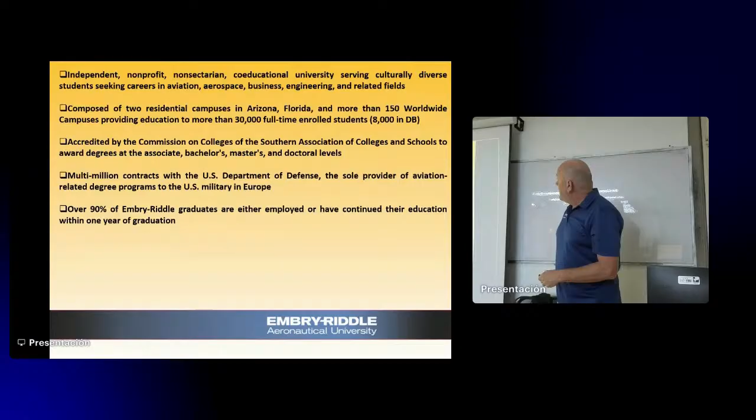Yeah, that used to be it's actually pretty old information. I tell you, I was asking my department chair to give us the best of the best, the latest, but the new department chair is lazy. Sorry, it's the French lady, she doesn't want to do it. So for that reason, she just sent me some kind of overall, like one number. I'll show you that slide, one single slide. Used to be Tassos, he would give the whole spreadsheet of different statistics. Not much anymore. Okay.

Accredited by the Commission on Colleges of Association of Colleges, etc. We have a lot of money coming from the Department of State and Department of Defense. Department of State is tiny, like the Fulbright scholarship - you get something, but not much.

Department of Defense, of course, is big, because we have the largest ROTC contingent in the country, I think. ROTC is basically for people who want to serve in the army and take classes at the same time, so we have the largest group. You'll see them marching on campus all the time, raising the flag, etc. Students basically get the education for free if they serve in the army.

How about that? I know some Russians will ask, can we actually serve in the army? But I mean, it's not for everyone. I guess if you're a citizen, or maybe even a resident, I don't know, you can serve in the army and get education for free. That's another option.

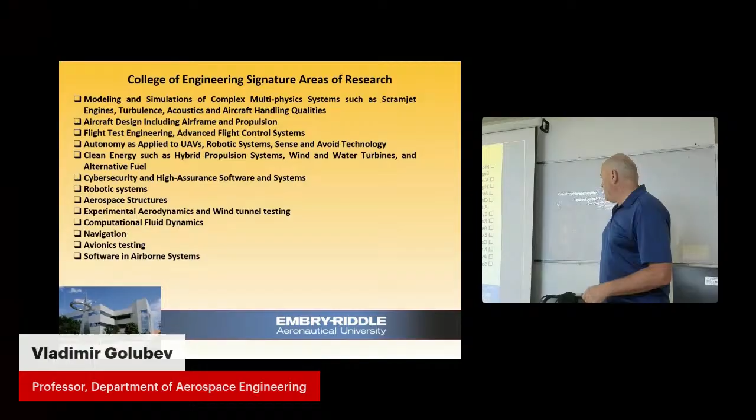Okay, this is our college. Used to be when I came in 2001, that was the most modern building. If you look at the campus at that time, there's nothing to do with current. Everything was demolished except for that building, so this is now the oldest. Everything else is brand new, so this is like a shiny campus, looking very, very modern.

So now what's the split in the engineering departments? This is what makes it really unique. We're like 75% aerospace engineering, and usually it's the opposite. Usually aerospace engineering is either its own department or it's part of mechanical aerospace, or mechanical aerospace and ocean engineering combined. I've seen different arrangements, but usually aerospace is smaller. We have the majority of things in aerospace.

So we're really proven in aerospace. You see all those other places - computer science, electrical, mechanical, civil - regular things, but they also have an aerospace flavor. We like the ones which are focused on all that.

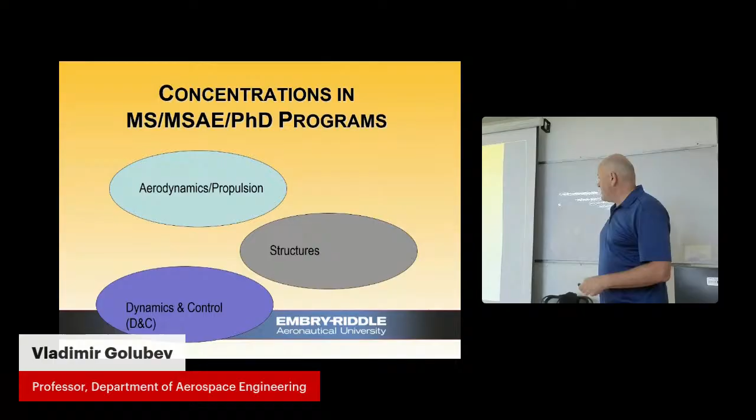We have the legacy course. It was taught by several faculty - Kinzel was teaching that, the Rinsons were teaching it. But of course the guru just finished, retired. He became, just announced last week, a professor emeritus - a very famous guy who used to be a distinguished professor. He was number 5 aerospace engineering specialist in the world. There's a ranking of all aerospace engineers in the world, like millions of them, but he was number 5 in the whole world. And he was sitting right next to us - it's Gordon Leishman.

Leishman wrote this bible of helicopters called Helicopter Dynamics or something like that, and that's what everyone uses in the helicopter industry and academia to learn about rotorcraft. So he just retired - I got this information yesterday together with a short notice from our department chair. That was part of the department faculty meeting, which I of course missed.

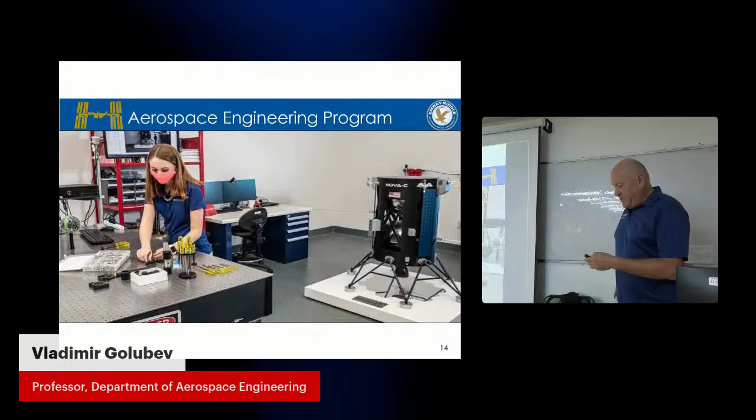So that's how the building situation came to be - almost 30 years, and now we're up to the new building. In fact, we don't have enough space because the number of faculty over the 20 years that I've been there more than doubled. The number of students, I think, tripled.

I'll show this number. It's good. And then,

We have concentrations, so in 2000 that's a big event for us. We started the PhD program only in fall 2013, and the very first PhD student was my student. Nguyen, I'll show his picture. He's now a group leader at Lockheed Martin. So he's a big guy now.

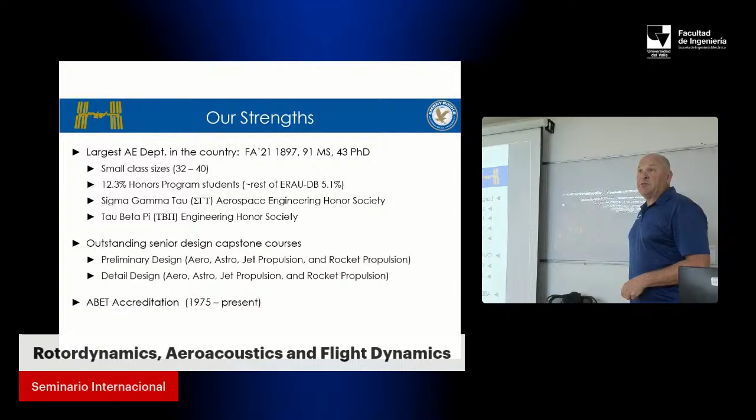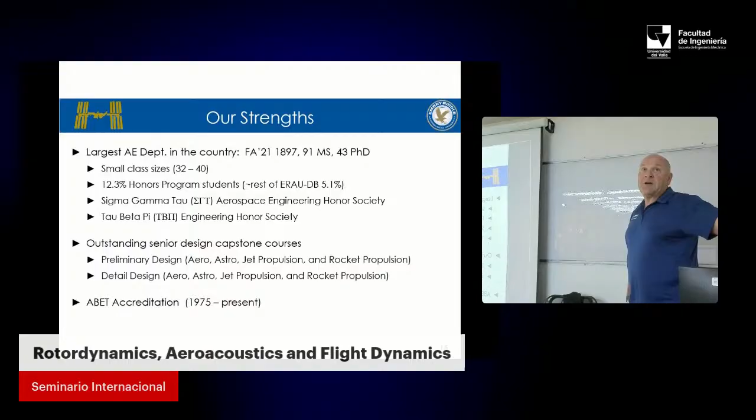Do you have ABET accreditation there or something similar? Our universities are... I think they're not. It's a pain in the neck for everyone using it, you have to do accreditation. That's one of the problems when you try to do any kind of dual degree with another university—the first thing that comes up and cuts the whole thing is: are they accredited? How can we do accreditation with them? It's a very strict process, so we cannot just take courses from outside the country or from a university that's not accredited. Otherwise the degree will not be accredited. It's like a loop.

High-tech facilities, MicaPlex—that's a research park established for technology development of some companies, hybrid aerospace things, etc. We have this new... well it's not that new anymore, it's like 8 years old, but everything was new: the new Eagle Flight Research Center.

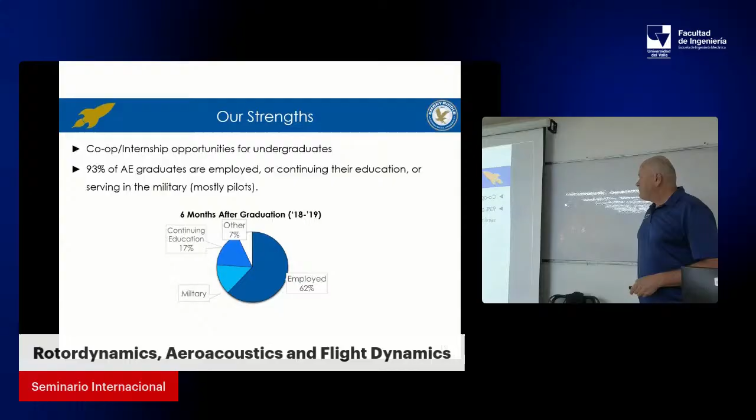Ranking - you're all familiar with the US News and World Report ranking system. That's what everyone watches - all the families look at what is the best school, what is most expensive, because US News and World Report publishes this ranking, like a big brochure with all possible things, like the best out of space, the best this. But anyway, for 16 years in a row we were the #1 school, but that was when we didn't have the doctoral degree, because doctoral degree schools have a different ranking - they're in a different area. So that was the issue.

Now we rank #5, I'll show you. Now we're tied with Michigan because we started a doctoral degree program. So that's an issue - graduate school is still ranked #32 right now, but we're catching up.

So there's lots of competition, because again we have over 100 clubs. You do competitions like coming up next or something. So we have these competitions, usually organized by AIAA - our main society, American Institute of Aeronautics and Astronautics.

I encourage all students to become a member - that's our main professional society, so we're all part of it. All conferences we go to are AIAA conferences. And there's all kinds of competitions, particularly important is DBF - design, build, and fly. You actually build a plane from scratch and fly it following some rules.

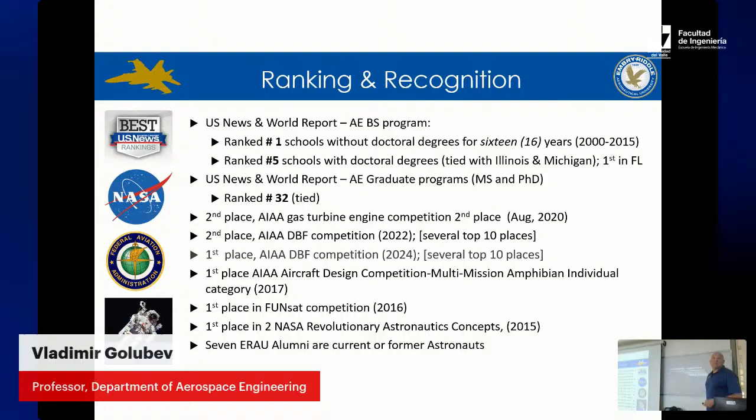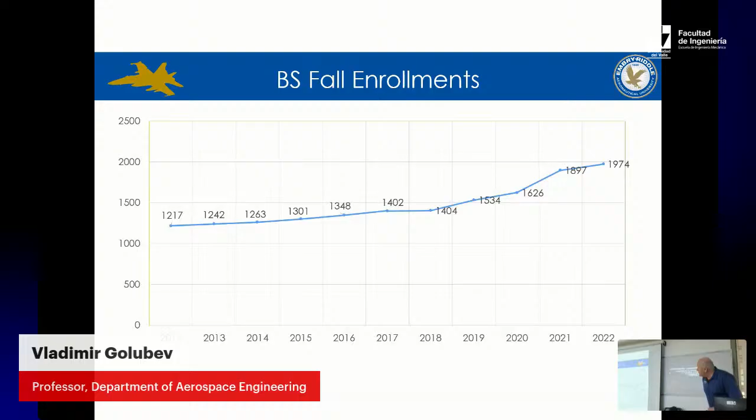So this is up to 2022. You see how things were going up - this is basically our undergraduate enrollment in the fall of 2020. It was going up from 2012. Look at that, from 1,200 to like 2,000.

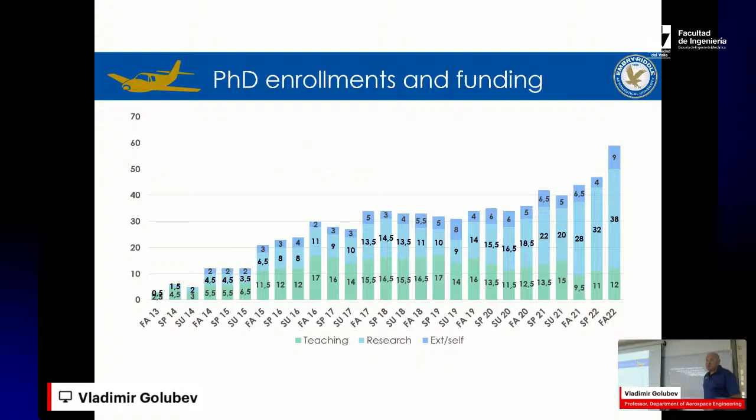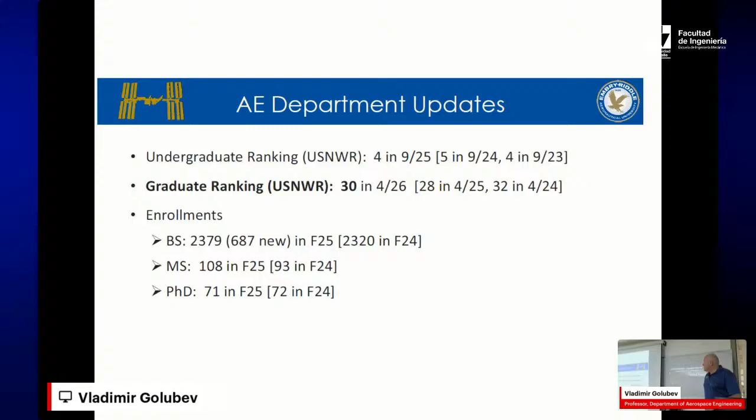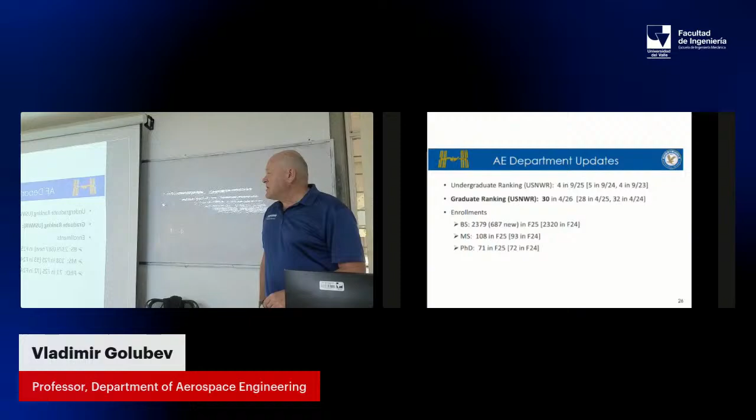Okay, so this is the enrollment, the latest data in fall 2025 - almost 2,400. So we doubled in 12 years the number of students. You see this aerospace engineering alone - it's not like the whole university, it's our undergraduate degree in aerospace engineering, 2,400 students. Unbelievable. I think number 2 is like Georgia Tech, like half of it. And then the rest - so we're like way ahead.

And then PhDs, we have 71. Masters 108. I like PhD more, because usually PhD is basically what people can commit to - they commit for 4 or 5 years, they do research, they can do something. Masters, they want to finish in 1 year, that's it. So if they finish in 1 year, you basically just give them something and they're gone. There's no time for any kind of meaningful research, so that's usually the bad thing about masters. So we don't usually offer much, specifically for internationals, well for everyone - we don't really offer much support for master's students, only very select ones. For PhD, everyone is covered, of course, because they all come from countries which have no funding otherwise.

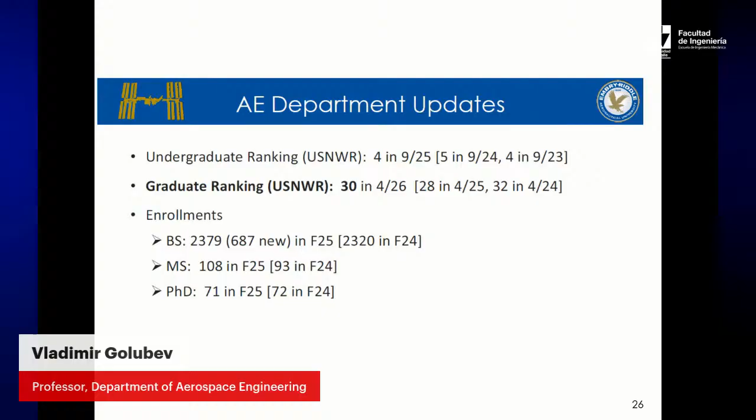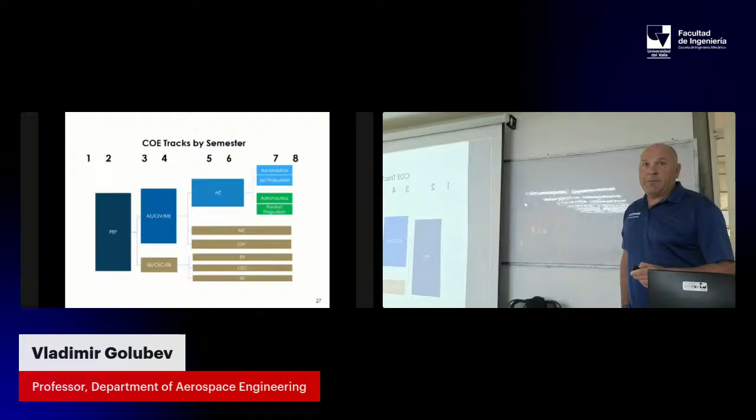So this is actually the tracking of the COE tracks by semester. As I mentioned, the first 2 years is pretty much combined - this is a fundamental engineering program. The first year, everyone takes the same thing, all different departments do the same. Then in the second year, there's a split between the computer guys, electrical, and the civil, mechanical, aerospace - there's different courses. At the end of the fourth semester, second year, they make the decision who's going to aerospace and who's going somewhere else.

So this is the split, 5th semester, 3rd year. And then eventually in the last year of the undergraduate program, that's where there's a clear split between aeronautics, jet propulsion, astronautics, and rockets. Usually people make this or that selection, so they can take courses in any of those. And of course, a lot of people go into astronautics - thank you, Elon Musk, because everyone is trying to do some space stuff. But still, we have a lot of people doing aeronautics, and especially now, as you'll see from my presentation, aeronautics is becoming really big. We have a lot of different things going on in aircraft, and it's a really interesting time to be there.

So basically this is all split depending on what different people want to do. Like if you want to actually do aeronautics, this is for people interested in broad knowledge about atmospheric aircraft - airplanes, helicopters, unmanned aerial systems, and all kinds of things.

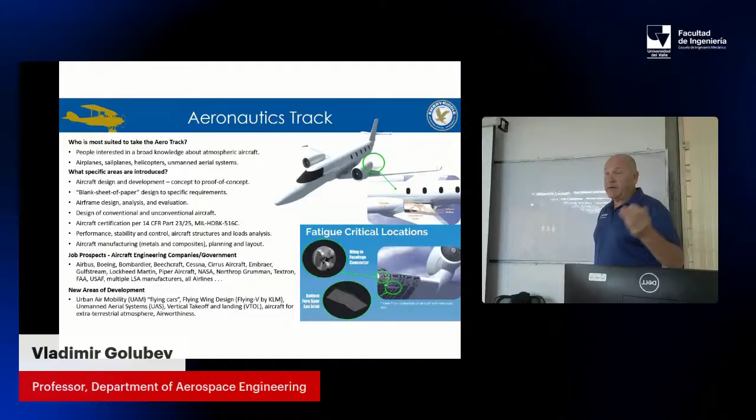This is what we're doing right now with NASA - the flying cars concept, which is what we're going to talk about. This is becoming mainstream: flying wing designs, vertical takeoff systems, and eVTOLs particularly - electrical vertical takeoff and landing aircraft.

That's what you definitely need to develop in Colombia. That's your future, guys, because that's how you're going to fly - between here and Manizales and Medellin, not going through Bogota, just straight across. It's like a taxi, or you go over the ridge and get right over.

That's something we should do. Companies like Joby or Archer are really developing this, very interesting. Dubai would be very interested in this because the first thing they talked about was flying in Dubai - of course Dubai has all kinds of money to invest. We're ready for everything, not so much now, but in general.

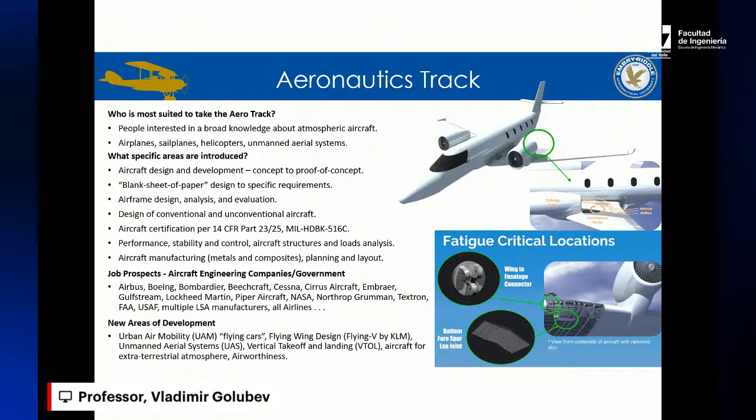Jet propulsion - a lot of things related to jet engines. That's what I teach, jet propulsion, although I also teach aerodynamics and CFD, lots of different things. So air breathing engines and jet propulsion, all kinds of things.

You can design turbofans, turboprops, turbojets, ramjets, or scramjets - any of those things is what you can get in this area.

There are companies who hire mainly engineers in the propulsion area - Pratt & Whitney, GE, Rolls-Royce, Honeywell - those are the main companies that hire in this area.

So there's a lot of things here. Cycle analysis is the biggest part - you do cycle analysis as part of the jet propulsion course, which is how you do your preliminary design of engines.

We move to the most sophisticated stuff, which of course involves CFD functions - you need to do computational analysis to understand the motoring process and everything else, along with materials, combustion, and a lot of things combined.

For extracurricular activities, as I mentioned, there are zillions of student clubs. We literally have student club fairs where the whole campus is filled with booths of students showing what they do, not just for design and stuff like that.

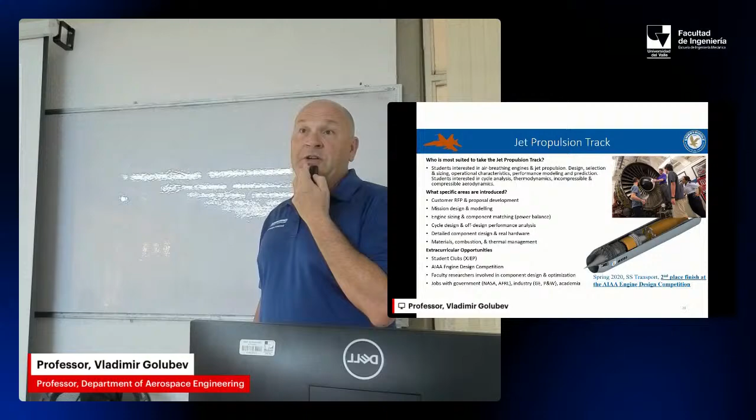I mean that's a big thing - if you like sailing, I like sailing too. It's also, by the way, aerodynamics, since aerodynamics can be applied both to airplanes and sailplanes, sailboats, and also bicycles, which have to be designed for competitive events.

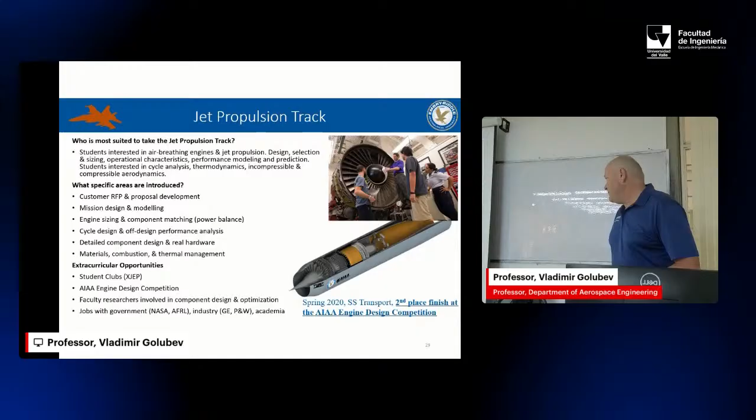I had some faculty and students who went on to be designers for the new generation of bicycles for big competitions, because they design very aerodynamic shapes. So aerodynamics is everywhere if you think about it - lots of researchers are involved in these things.

Astronautics relates to extraterrestrial activities - you can go to Mars or somewhere else to design satellites or rovers. We have faculty heavily involved in designing Mars rovers, for instance, or cube satellites. The school is doing a lot of things with space, and it takes Elon Musk to thank for that in part.

A lot of things on performance too - you have the sounding rocket club called Icarus, that Dr. Perel was doing for many years. I think somebody else is doing all this stuff now.

And rocket propulsion, well, I think you mean rockets, right? It's rocket propulsion, propellers, yeah, that's what I'm thinking about.

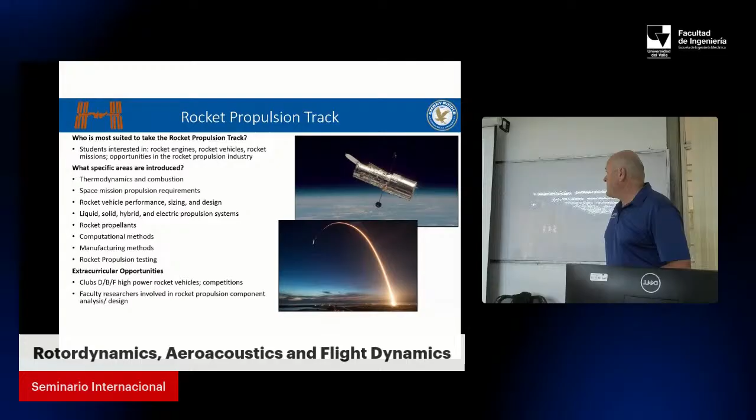Many clubs as well. Now, let's get to the actual area of research for all groups, but there's several faculty involved. I'm just director of the lab. We have a number of faculty and a whole bunch of students involved in activities in the lab. This is actually a lab.

The first PhD student I was talking about is from Vietnam originally. He just had a baby with his wife, so she's very happy. Probably, I'm not sure.

This is actually my collaborator for many, many years, and he's a founding dean of the College of Engineering. That's Dr. Mankbadi, that's him. This guy is somewhere at NASA. This guy's in Hawaii. Our faculty member from Romania, very interesting guy, doing all kinds of controls. At some point he said, I just want to live in Hawaii, sorry, bye-bye. He went and established his own company in Hawaii. I'm not sure what he's doing, but he must be very happy. I think he's surfing most of the time.

I'm sure. There's another guy from India. This used to be a DOD guy, but then he left. He's from Eglin Air Force Base. He was a scientist there. We collaborated with our reports. Anyway, people change completely, and we just have two of us left. Look, Mankbadi and myself from this group.

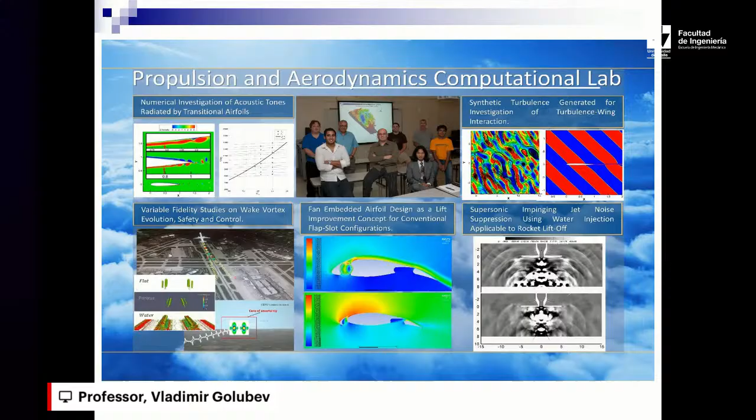In 2010, I was researcher of the year at Embry-Riddle, like best researchers. So that's funny, they decided to start this tradition at that time, that the researcher of the year presents his research to the whole university at the huge main auditorium, like celebrity hour. And so I was the very first one to do that. Honestly, I was the very last one too.

I was the only one who started, and they decided not to proceed, because I guess the administration was frustrated. I think they couldn't understand the work, so they said, that's it, but finish the thing. So I was the first and the last. This was actually the title slide for that presentation, because that's pretty much what we're doing.

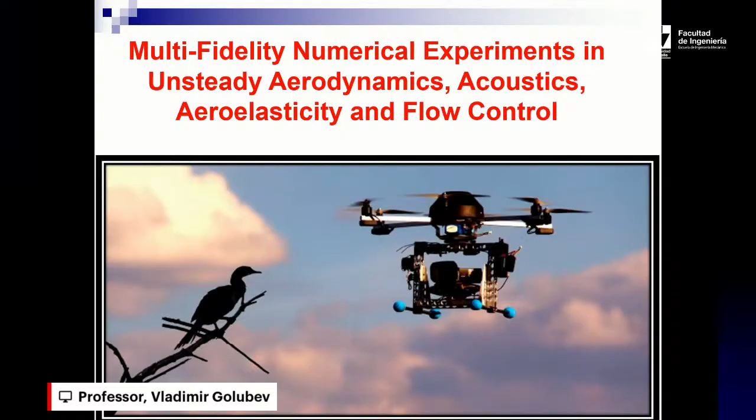It's multi-fidelity numerical experiments in aerodynamics, acoustics, aeroelasticity, and flow control as well, because we actually have that. So it's all numerical experiments, I had to calculate, but it's actually multi-fidelity. We're actually moving very rapidly into the area of multi-fidelity or variable fidelity codes, where you combine various tools which have different fidelity levels, and they need to be verified and validated, and that's one of the biggest things for us.

So in this presentation, let's see how much time. Okay, so this presentation is very introductory.

So what I'm planning to do is show basically the slides, like one slide per project, what we were doing recently, because other projects specifically will be focused on in the next presentations. So I'll be kind of circling or spiraling, there'll be more emphasis in some areas, and then even more emphasis later on. So sometimes I will address the same project three times, so you'll see that it will be more and more detailed. So at some point, once you repeat three times, maybe you'll understand that. Repetition is the mother of learning, right? So you have to do that.

So very quickly, what we're doing, a lot of things with flow control. Flow control is a big thing now, so you can control aerodynamic flows, but also for acoustics, for propulsion. There's a lot of actuators which do this, and a lot of closed loop control systems which do this, including nonlinear ones. This example is where we started to do a lot of things related to synthetic jet actuators. I'll talk about this specifically later on, there will be separate presentations.

This is really the tool for us to control the flow by controlling the boundary layer. That's one of the things we're big in, and that's how I actually got my grants in the beginning. For instance, we're trying to control the aircraft with synthetic jets instead of ailerons, so there will be no mechanical motion or devices anywhere. You just have microjets, arrays of microjets, which can control your flow, your angle of attack, your moments, and everything. That's the idea, so we did the steps on this research.

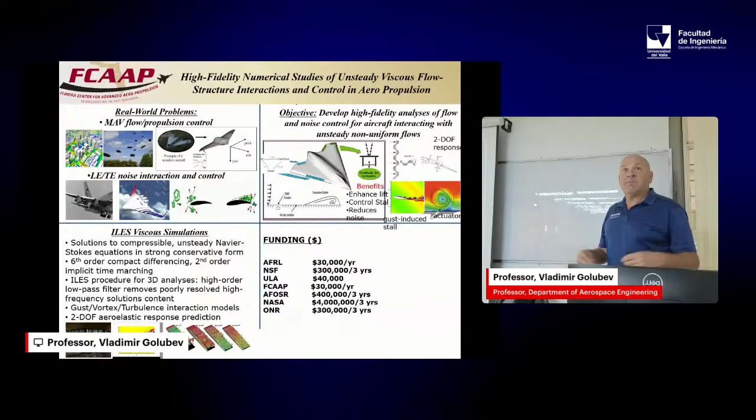All kinds of interaction of gust, vortex, turbulence with aircraft structures - the effects of this, like when you're flying in the aircraft and you start bouncing, you're like crazy about this thing. It's called turbulence, right? You say turbulence, please - what is it? Put your seatbelts, sit down. Right? That's what they tell you on the aircraft. So this is the turbulence interaction.

We're studying this turbulence interaction with the wings to understand if they'll fail. If we know this, we know that nothing will fall - shouldn't be afraid of that. But in terms of reaction, yes, it's important how the aircraft will react. And maybe some aeroelastic things, aeroelasticity, right? For instance, you can get flutter.

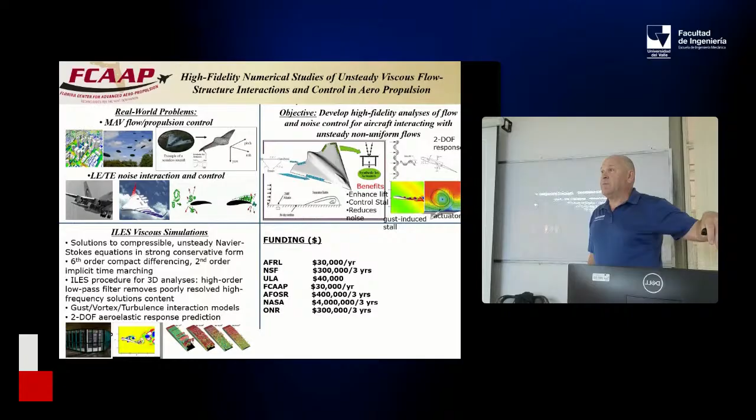It used to be that wings did fall off in the 30s. People had no idea what was going on - the aircraft were flying, all of a sudden boom, your wing is off, and you're done. People could not understand the phenomenon until in the 40s, Theodorsen came in the US and explained the entire thing. He analytically explained and showed the envelope where you have to be to avoid this kind of condition - what kind of structure should be, what kind of flow should be, etc.

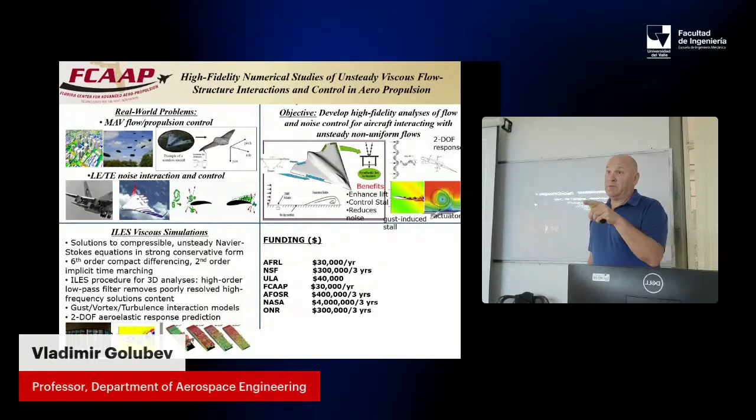And that's how everything is designed these days, not to get into the unstable envelope. So that's how we don't get into fluttering. That's why we don't lose the wings when we fly. It used to be nobody knew, but now some guy comes and opens that up.

We do a lot of research on aeroelasticity, but we do it the opposite way. Flutter for us is a good thing. I'll show you how you can actually extract energy from flutter. That's a good thing instead of the bad, but it used to always be considered bad.

Anyway, this is our Vega cluster, our HPC system, high performance computing. We have like zillions of nodes, I don't even know how many.

So we do parallel computations for CFD. That's the big thing. This is actually the visualization of the airfoil, all the vortical structures, etc. That's how they behave on the airfoil, like there's a gust interaction. They have the boundary layer collapse, basically being wiped out by the turbulence, the gust interacting with the boundary layer.

So just in fluids research in general, we have many things going on. Right now the biggest is NASA, like $4 million we do just for us. Altogether, no, for $4 million, that's actually for our team.

I think Embry-Riddle has 1.4 million of that, the part I'm in charge of because I'm PI, principal investigator. That's how I get all my students, like 5 students covered, startup funds, all these things. I have 2 more faculty, like my colleague, for instance. So that's how I spread all this around.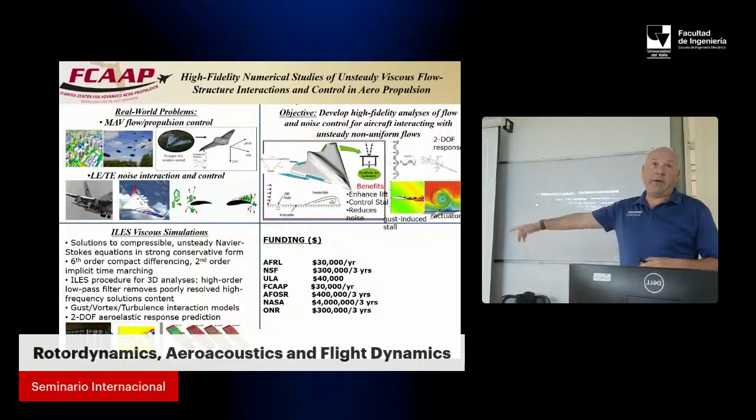So they were asking us how we can control this thing. There were ideas which we actually model right now, but they implement it. It's basically water infusion - a bunch of water is infused at the start in these jets, and that suppresses a lot of acoustic load. And that's a big thing. So the same process we're actually proposing for the Navy, through some modification, but that's the thing.

So, Fulbright project. In 2023 I finally went. Everything was delayed. I got the award I think in 2020, and then it was COVID, so Fulbright completely closed - Department of State, everything's closed. So it was basically finally started in 2022, 2023.

Anyways, so this was a 2-year project at Kazakhstan, at Nazarbayev University. It's very big, and it's a very rich school because it was all the stolen money by Nazarbayev. Whatever he stole, he was not just - he was not a good guy, he stole, but then he invested in some good things. He invested in Nazarbayev University and got it funded under his name. This Nazarbayev University was established in Astana, the capital of Kazakhstan.

And they spent a ridiculous amount of money to bring the best faculty from around the world - from Imperial College in London, Delft University, the best universities - and spent ridiculous money on equipment for the experimentalists. There was a very famous scientist I met while going through rounds of introductions with everyone. He's a very famous guy from Delft, and he told me, 'Oh my gosh, I got so much money, I got equipment I never dreamed about in Europe, but now it's all here.' So he was just showing me.

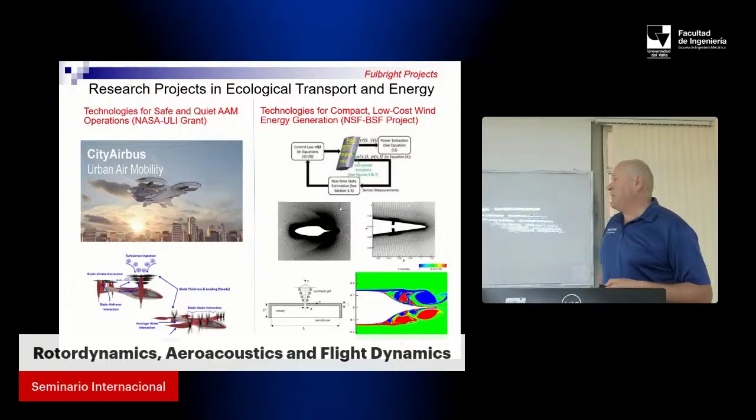Anyways, Nazarbayev is gone - imagine, he's now in prison. But the thing is, in the end, this university is still there, but the money now really released to it is much less. So the people leave because they don't have much salary anymore. It's interesting what's going to happen. But at that point it was already dwindling down, but still there, so at least I could find one guy to do some collaboration with. Right? So that was the thing.

As part of this Fulbright project, ecology was a big thing - ecological transport, energy, something really green. So the air taxis will be green, the eVTOL, electrical vertical takeoff - everything will be green energy. We talked about the project with NASA, with NSF - NSF was supporting us with Israel through the joint NSF-BSF project. BSF is the US-Israel Binational Science Foundation. So we had this, they did the experiment, we did all the numerics.

That was about getting energy from flutter. As I mentioned, flutter is usually a bad thing - it's the interaction between the wind and the structure. You've probably seen it, like in the wind sometimes you look at a fence and it starts vibrating - that's flutter. But if you design the structural properties properly, you can actually extract the energy from this motion very efficiently.

So this is wind interacting with a plate, creating the scene, and you can get energy from the plunging motion. People have tried this before - it's been around for many years, forever, you could probably see it even with dinosaurs. But it was never controlled, because if it's not controlled, it's very chaotic - it can go up and down, you just can never control it.

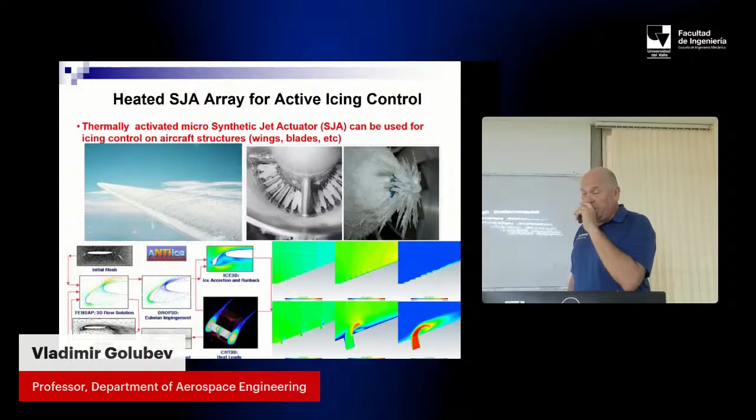But people in Canada, Russia, any kind of country that just produces that particular condition, it's really dangerous. Right now, if you've ever flown into the north, usually your airplane is delayed by like 10-15 minutes because you need to get to sprinklers that spray a special type of de-icing liquid on your aircraft before it takes off. That's what they naturally do to prevent icing. But sometimes it doesn't work - you still have a lot of accidents happening from time to time.

And so this thing actually works like magic. We showed this, and I'll show this in another presentation. All icing is gone in a sec - actually it's not, it just prevents it. It's now out. In this case, that was an interesting thing.

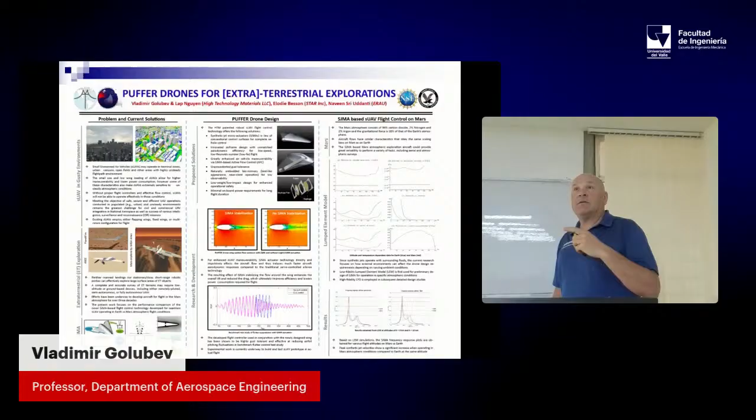That's a very busy slide. There was a poster for the Festival of Science in Washington some years ago. At that point, we were actually thinking, can we use those synthetic jet controlled aircraft as drones for exploring Mars or any other planet? So this is what you see - puff - we call them puffer drones because they puff the air, the synthetic jet puffs the air. Puffing puff drones for extraterrestrial exploration. That was the topic of this thing, and a lot of things we're discussing here.

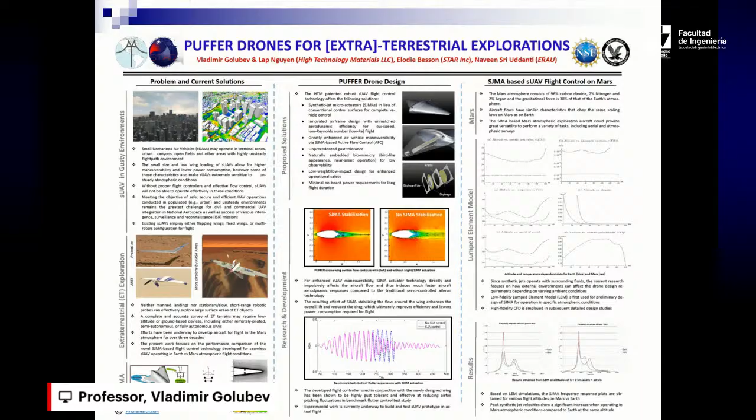You basically need to run simulations with the conditions on Mars. Atmospheric conditions are a little different, but you still just have to apply the dynamic similarity rules - Reynolds number, Mach number, all these things. If you do it properly, it flies like magic, everything's fine. So we did this thing, we explored it and showed how we can do this. It was very nice, interesting stuff.

All right, that would probably be very interesting to Dr. Guillermo, since he's doing the controls and instabilities work. This was a project where the Air Force came to us and asked for help. There's a guy called Amitay - he is at Rensselaer, RPI, right? So he was doing experiments on how you can control instability in the boundary layers on airfoils, on wings in general.

And the idea was that he actually put, experimentally, some actuator - some kind of mechanical actuator. It's actually moving up and down, a tiny bit - you can barely see it going up and down. It creates the excess instability wave because in the boundary layer there's a shear layer, and every shear layer basically produces the condition for instability to develop.

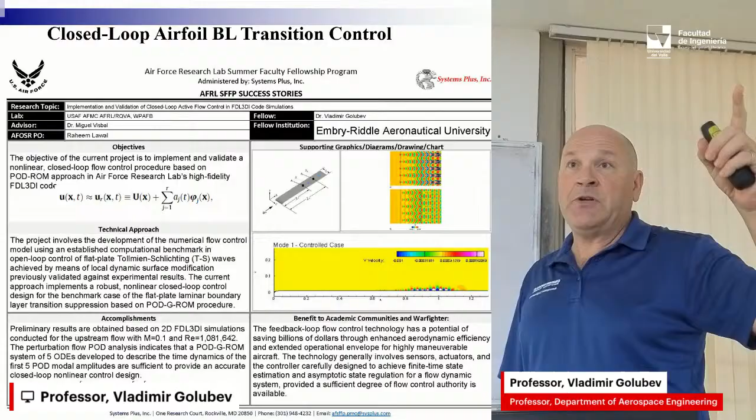It's called Tollmien-Schlichting waves. So this Tollmien-Schlichting wave, you excite it with a specific frequency and amplitude using some sort of mechanical actuator upstream, and that's what he did experimentally. Then downstream he put another actuator, which is supposed to suppress this instability wave. So he was trying to design a way to do the actuation such that you suppress the upstream wave and delay transition. That's the whole point - how you delay the transition from laminar to turbulent flow. Right? That's the big thing.

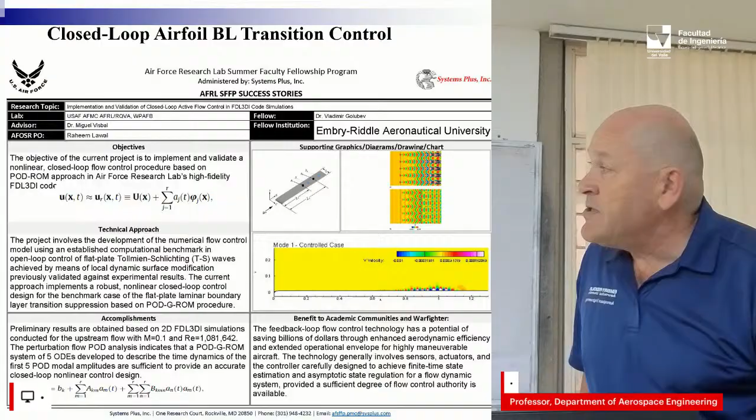And so he did this, and you can see what happens on the surface. If you do the open loop control, it's quite clear you need to have one wave of the same frequency, but anti-phase.

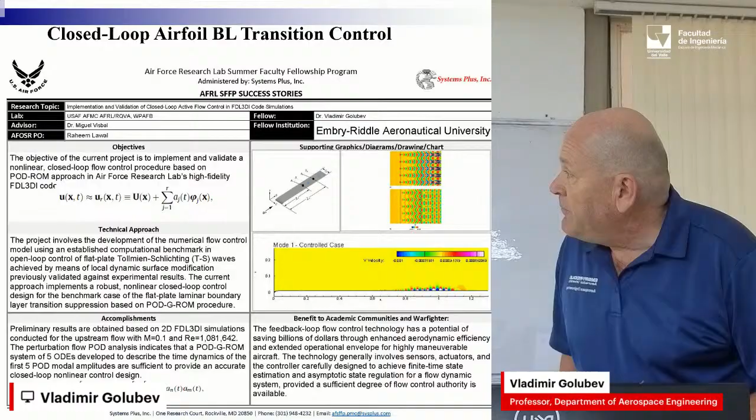So you kill the phase of the first guy—that's how you kill your instability. So in the open loop control in the experimental setup, it works pretty reasonably. You have this instability which grows into turbulence, boom, almost have nothing. So it works. So we try to do this, and then the Air Force tried to do this.

It's all flat plate. So on the flat plate they did this numerically—the closed loop control system, to see how you can actually do this for any kind of frequency, any kind of amplitude. And it works. You see this instability grows and it decays. They could do this with some level of success. They had a nonlinear closed loop control system, but very basic.

We actually were prominent in doing very sophisticated nonlinear controls with this guy from physics, engineering physics. So we tried to do the same.

And then they went to the airfoil shape, real airfoil shape, with the camber and everything, like thickness. Nothing works. Nothing works anymore. No matter what they try, nothing is suppressed. You suppress it a tiny bit, then it goes back. So they asked us, can you do it for us? Can you see if you can do any kind of nonlinear controls? So we tried, and it didn't work.

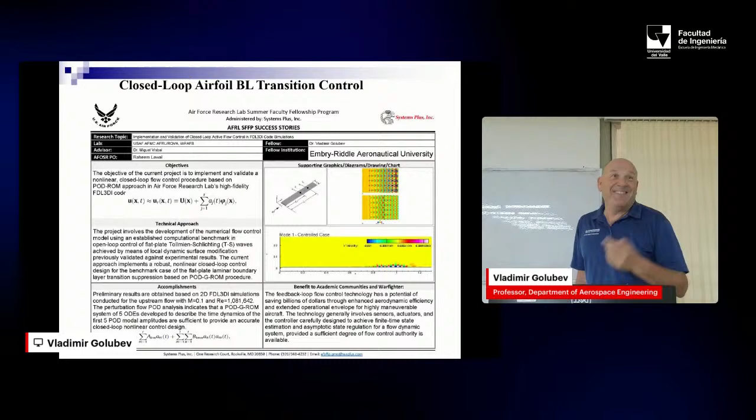So that's one of the unsolved problems in physics, guys. If you ever want to solve it, please be my guest, because that's a very tough problem to deal with.

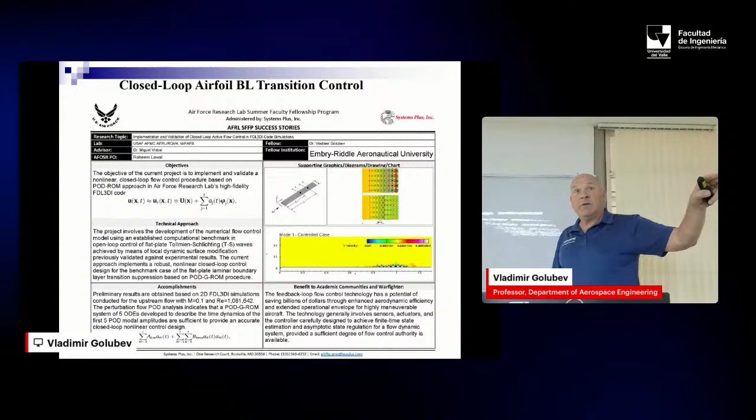The idea is that you can actually control any kind of instability, but you don't know what's going to happen—it's going to be any kind of disturbance which has been exciting. We have the idea that with proper actuation, controlled nonlinearly with a feedback loop control, you can basically suppress the whole bunch of these instability waves, and basically delay transition and decrease the drag and increase aerodynamic efficiency—all these big pluses, big benefits, save billions of dollars. So this is a big thing.

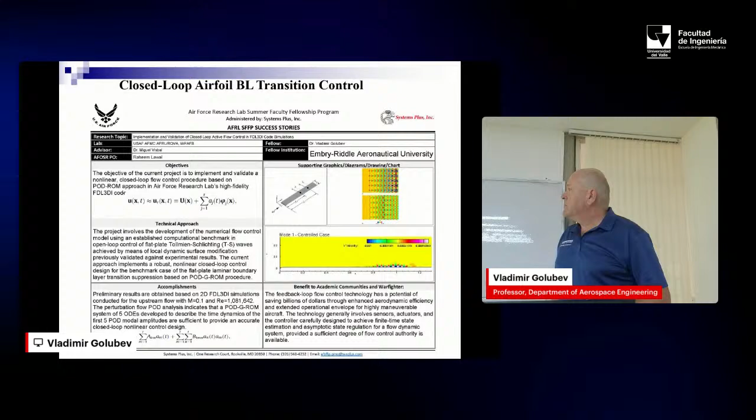In fact, it was such a frustration for the girl who was doing this. She was doing her master's, continuing to PhD, and then she was failing. She was crying and said, 'No, never again, I'm going to touch this damn computer.' So she wanted to become an experimentalist.

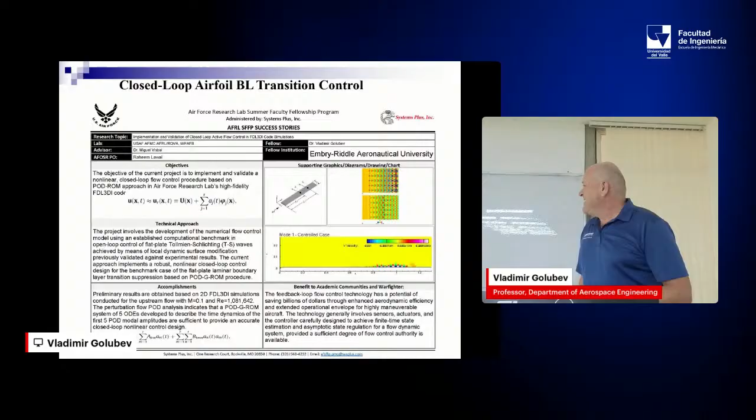Nothing worked. So that was interesting. This is actually how it looks like—this is the real shape of the airfoil, and no matter what you do, you can slightly suppress it and boom, it still keeps going. It keeps increasing, so you still transition. Maybe you can delay it by a tiny bit, but it's not really what we hoped for.

Then when they move to the KH wave—Kelvin-Helmholtz—it's an inviscid instability. TS is the viscous instability, that's boundary layer stuff. They can actually transform into KH wave when you have the laminar separation bubble, because the laminar separation bubble basically sustains the inviscid instabilities. It's separated, so it becomes inviscid, and that's where it grows exponentially really quick.

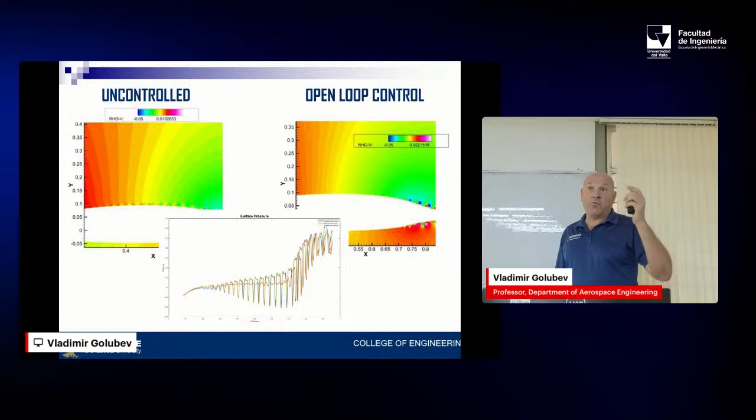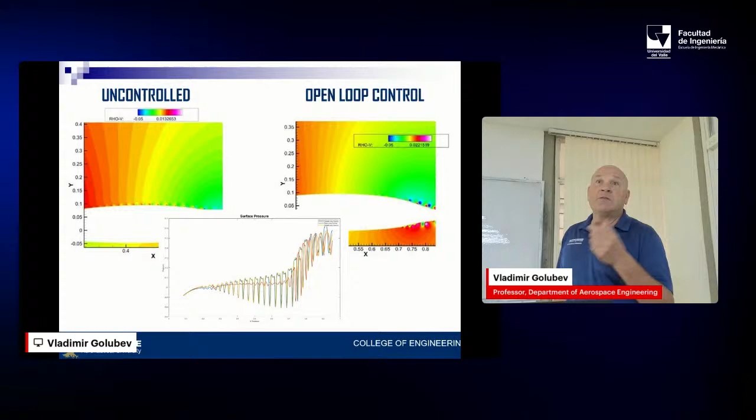This is just TS—it's slowly growing, but it transitions, and when it transitions you lose your efficiency. So that was a good question.

I'll be having a separate presentation on active jet noise control. That's a big thing for the Navy, even more than the Air Force. We were trying to figure out how to control the noise from jets. That's one of the oldest problems in aeroacoustics - in fact it was the first problem in the field, ever since Sir James Lighthill invented aeroacoustics in the 1950s. The primary goal was to suppress jet noise because jetliners started to appear at that time and were extremely noisy. Nobody knew what to do with them. Then a generation of people came, including Chris Tam and others, trying to explain what the screech tone is and other phenomena. We're continuing along this line historically. Dr. Mankbadi was the chief scientist primarily on jet noise at NASA Glenn Research Center before he joined Embry-Riddle. I'll talk about this in a separate presentation.

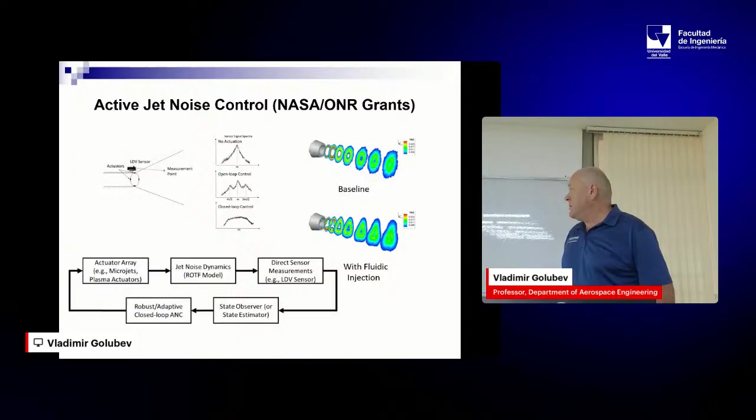We also do nonlinear controls there, using synthetic jets. You can also do other things, like plasma actuators. Those are all active control methods. Passive control people use things like chevrons on the jet nozzle - that's very classical now, to suppress noise from the nozzle to its full extent.

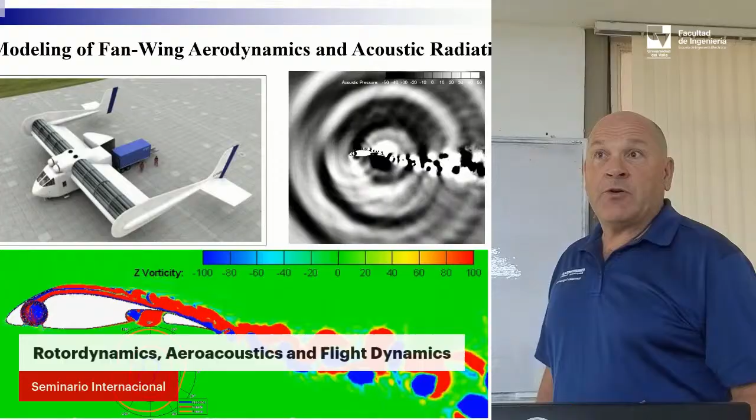This is a project which is really fun - I'll talk about it in a separate presentation. This is actually a fan wing design - a wing with an embedded centrifugal fan. This is another active control device. The centrifugal fan acts to produce extremely high circulation. You know what the Joukowsky theorem is, and what lift is - rho v gamma - it's all proportional to circulation. The higher the circulation, the higher the lift. So this is what's called an ESTOL device, for extremely short takeoff or landing aircraft. It's not vertical, but very quick, so you don't need much takeoff area.

We actually did this kind of analysis, but for me it was fun because it was really interesting historically how the whole project appeared - it's one of those things that's a legacy of the Soviet Union. Anyway, there will be a separate presentation where I'll talk about the history there.

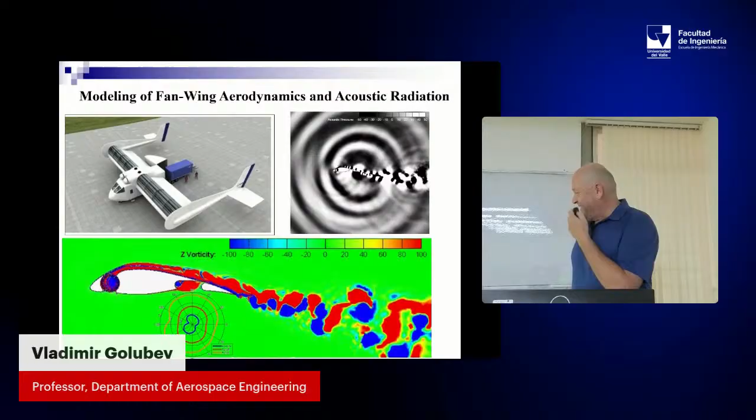Dynamic soaring - there will again be a separate presentation on this research. I'm not going to talk much about this, but this is what's called albatross flight. We're trying to design an aircraft UAV which will be flying pretty much without much battery - it will require some, but not much.

Ever since Rayleigh in 1886 published his paper saying there should be a way to do these things if you have non-uniform flow - and that's true. You have to have a shear boundary layer, like an atmospheric boundary layer, for this to work. What these birds do is use the flow with the boundary layer - this shear flow is employed by the birds to extract energy, so they can fly indefinitely long without much effort. They even have a special locking mechanism in their wings so they can sleep while flying. They don't even need to land, except sometimes because they need to have babies. For the most part they just fly and can circle the whole Antarctic without doing much, because they get energy from this mechanism. Well, they still eat, so that helps too.

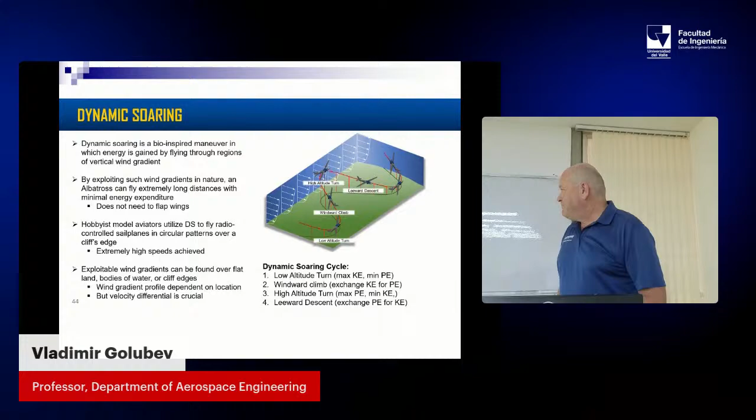That will be a complete simulation of this thing, and that's how they fly - this will be elaborated on later. The idea for this project originally was not just to look at how this works and do the pilot study, but also to see if we can do various types of geometry changes, like variable span, variable sweep, variable dihedral for this type of aircraft, so it will be more efficient during flight.

That's just some tools I'll talk about. This is a big project on feedback loops for transitional airflows. As I mentioned before, that's when TS waves move into KH transition, and that all relates to the various mechanisms of noise production in general.

What happens on the airfoil? There's a lot of different things which may happen: laminar boundary layer, vortex shedding noise, turbulent boundary layer, trailing edge noise, separation stall noise, trailing edge bluntness noise, vortex noise. All those are possible mechanisms for noise production by airfoils, and specifically by the blades, not just the wings but the blades of the rotor.

Right now we're doing this research with NASA on rotorcraft, and that becomes a big issue because the regimes of operation for these blades are not traditional like helicopters with very high Mach numbers. These are actually low Mach numbers, where these mechanisms, called broadband noise mechanisms, or sometimes tonal noise with acoustic feedbacks, become most prominent. Never before were they an issue for helicopters, but for these kinds of devices it becomes a big issue. That's what we're exploring right now. I'll talk about this in more detail later on.

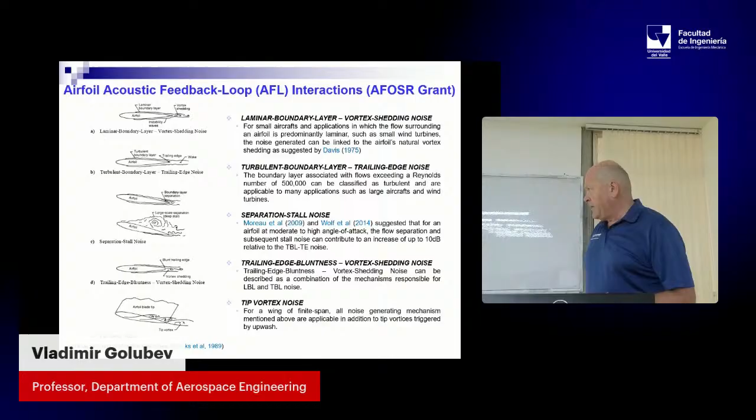In this particular project, it's all about the feedbacks which produce, if you look at the spectrum - you know FFT, right? FFT basically produces a spectrum of noise - this is called broadband, when it's not tonal. But this is actually the tonal noise. These tones usually don't appear; they appear only in unstable conditions, when I have this envelope here producing tones.

That comes from the feedback - acoustic feedback, which is basically all coming from transition from TS to KH waves. That's what we explored, but many people tried and couldn't figure it out. This was one of the biggest mysteries in fluid mechanics for many years, because nobody could understand what was going on.

You'll hear this later on. I have the recording because the experiment was done in France. I was a visiting professor at the Ecole Centrale de Lyon in France, particularly working on this project.

So we did all the analytics. We got the money from the Air Force for that because we scared the Air Force to death. We said that the Air Force was trying to develop micro air vehicles for surveillance, spying things, right? And all of a sudden we showed that this thing can produce huge noise. So of course it's no longer a stealth operation. They were really scared, so they gave us money to investigate what to do. Otherwise it's not going to work.

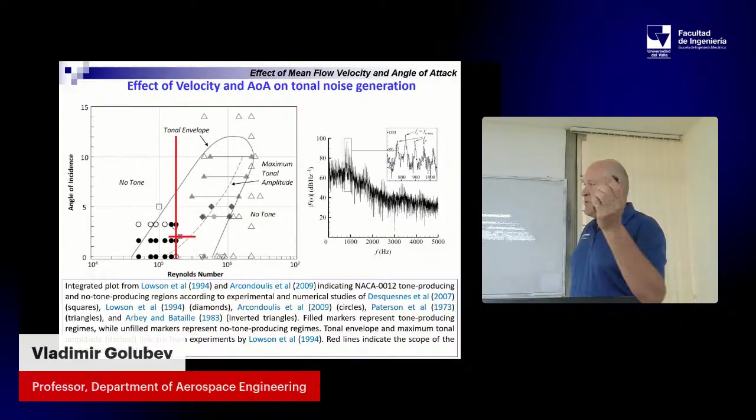So we were doing this kind of analysis for that reason, and the French were doing their experiments. I'll show the recordings, the noise - when you go outside this envelope and then go inside, it's just crazy. We'll see that. This is all about these feedbacks. That's what I'll show here.

On the airfoil, the boundary layer thing is TS waves, but TS waves grow slowly. So by themselves, TS waves would not be able to produce any kind of noise or feedback like this. It's all about the thing people could not understand: there must be an LSB, a laminar separation bubble, very close to the trailing edge. The condition for this noise is when this TS wave is very close to the trailing edge, then you have transition to KH waves, which become really high, and that sustains the noise.

But when you increase the angle of attack, what happens to the LSB, to the bubble? It moves upstream, to the leading edge, and then after the LSB, the flow immediately transitions to turbulence. Turbulence cannot sustain any instabilities, so everything is gone after. So only in the condition of one LSB at some angles of attack does this explain the envelope - I'll spend more time on this later. But this envelope is all about the area where the LSB is very close to the trailing edge. It's a very interesting thing.

This kind of mechanism was originally proposed by Longhouse. Before that, Chris Tam - if you don't know, Chris Tam is phenomenal, he's like 90 right now, still a professor at Florida State - he's a guru. He was the one who explained jet screech for the first time in the 70s, and published a paper on it. Screech is basically also acoustic feedback, the same thing. If you can imagine, there's a jet, there's a nozzle here, and this is a jet coming from the fan, turbofan or turbojet.

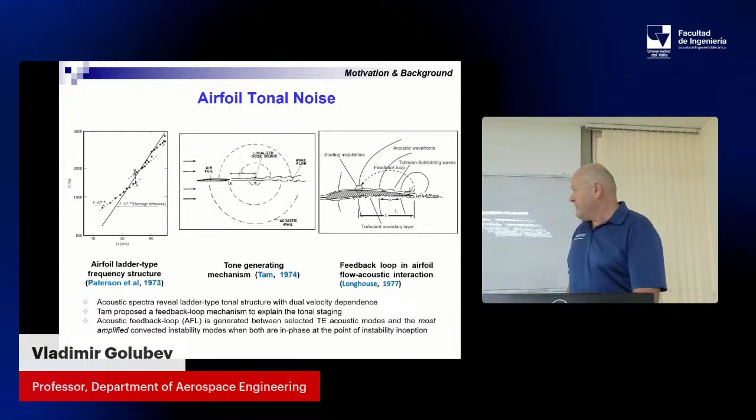Now I'll be focusing on two projects. We still have time, which I will not be covering in future talks.

I'll talk about Marina's project later on. Peter was pretty much doing the work for both of them, but he's a genius. He actually works in a completely different area now - he went to Purdue to work for Alexeenko on chemistry, chemical things for films. No, he's now in pharmaceuticals somewhere, they're all over the place. I thought I'm everywhere, but Alexeenko is everywhere indeed - all kinds of areas of research, from chemical engineering to aerospace to mechanical, you name it she does it. She's department chair at Purdue for aerospace engineering. So he worked with me on this FAA research, and now he's a chemistry guy.

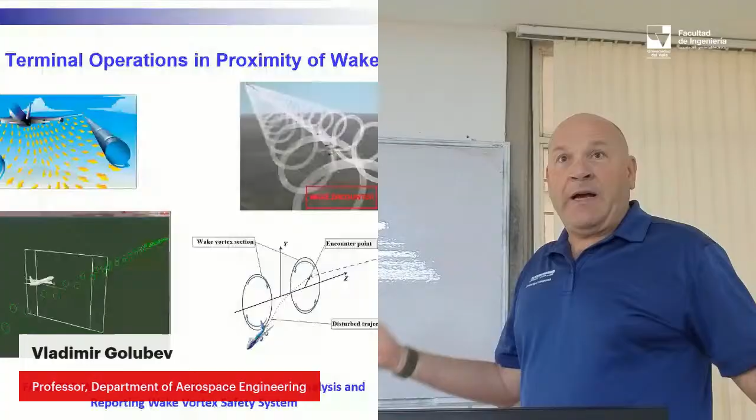Are you familiar with that? Remember the formula to calculate the induced drag? It's proportional to the lift squared. So you double the lift, you quadruple the drag. All these huge jumbo planes have to carry a lot of weight, so they have to produce a lot of lift, and they have a huge induced drag. But this induced drag is all due to the huge vortices coming up.

So anyway, that's what we have, and this is part of this prediction system from FAA. That's how it looks. They mimic this wake system and look at it. There's a leader aircraft in front and a follow aircraft, and you see where the wake interacts with the flight path of the follow aircraft. What happens when it gets into this flight path? So we were predicting the loads from this leader aircraft on the UAVs.

This could also be applied to terminal zones, or during flight. Did you ever notice, when you're in the flight path of a different aircraft, that you hit the wake during flight?

I'm not sure how much, but I fly all the time—this is my country number 99, so I've flown everywhere in the world, like in the last two years, twice around the world. So it happens. It's not just turbulence. When you hit the wake of another aircraft, you basically start jumping like crazy. It's not like all the time, it's like boom—that's what happens.

That's dangerous. Normal turbulence is okay, but this may actually be dangerous, particularly at takeoff because the ground is very close. If you hit this thing at altitude, you can still go down because you have air below you. But near the ground, that's how many crashes happen. For a general aviation aircraft, a small aircraft, when it hits the wake behind a big aircraft that just took off, something happens and then boom, that's it. There were many cases like that. So that was one of the biggest concerns.

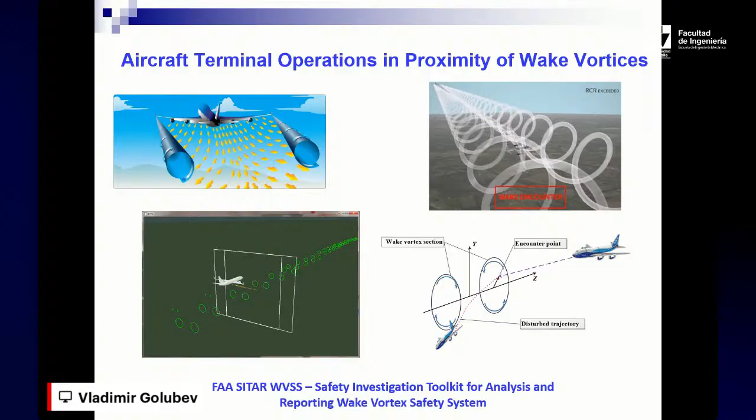So the thing we're doing on top of everything is OpenFOAM predictions. We have the system of two wake vortices, and we'll look at how these vortices evolve, because that's what's important. So behind this big aircraft, when it goes, it all depends.

The trajectory of those wakes all depends on the surface conditions. For instance, if you're next to the ocean or a river, that's the case of LaGuardia Airport next to the Hudson. Or if your airport is located next to a forest, or next to a field with grass, the trajectory will be different every time. That needs to be accounted for, since the elements mean the wakes will behave differently every time. So depending on the particular airport, we need to account for terrain conditions, solid or porous. We investigated solid, porous, and water surfaces surrounding the evolution of this.

So this is OpenFOAM. For those of you doing this work, we give the OpenFOAM setup. You do the software with this library, finite volume, second order discretization, PISO-SIMPLE. Volume of fluid is the method to account for this multi-phase system, which we have between, for instance, water and the surrounding air.

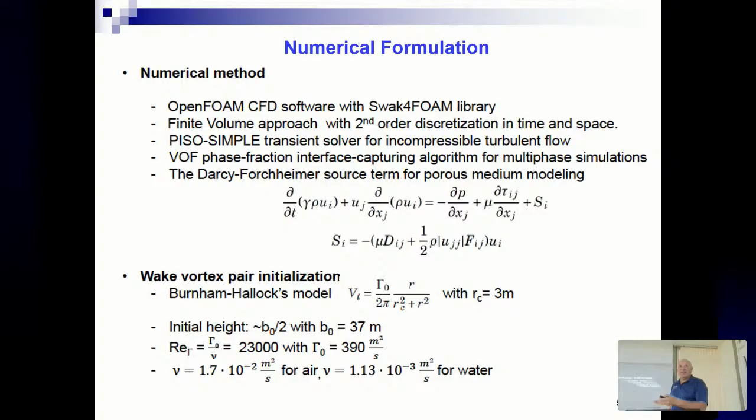But the FAA was interested, and you'd imagine the FAA should correspond a lot with NASA, and NASA with FAA. They just hate each other, really bad. They don't communicate. It happens also between different Air Force bases. I was a connector everywhere, between NASA and FAA, between Air Force Eglin and Air Force Wright-Patterson. They wouldn't talk to each other, even working on the same program with the same group names. They'd ask me to basically mediate. I don't know, it's some kind of psychic thing. Everyone is doing their own work and is very protective of it, particularly FAA and NASA. NASA develops a lot of things, why don't they give those packages to FAA? No. So we were developing ourselves, giving to FAA, and consulting with NASA, and NASA would say okay, we'll give it to you. So you understand, these are kind of strange things.

So, comparison with experimental data: for water surfaces we did this analysis, and it was pretty good in terms of the predictions. There was also DLR, the Germans, doing a lot of research too. They would come and talk to us at conferences. NASA wasn't still working on it, but DLR was. So we did LES comparisons, DLR LES, and we were comparing our results. I think we were actually better in many cases than the experiment, anyway.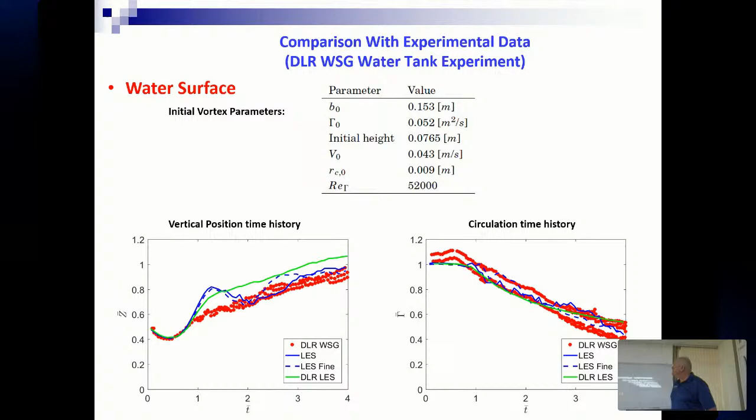So that's how, as I mentioned, there's a lot of interaction going on. You can see flat, porous, and water surfaces for different conditions, and the evolution of these wakes is totally different. That needs to be accounted for when designing operations for the UAV behind - you need to know where this wake is going. If you don't know, you just hit it without knowing. And that's what usually happens in crashes - the pilot doesn't know what's going on, he flies thinking the vortex is there, but it's here, and he hits it, boom, he's done. That's happened many times. So this kind of analysis is really important for understanding this phenomenon and what's going to happen. You see the trajectories, position in space, circulation - circulation is also different depending on the terrain. Vertical position, horizontal, every time it's very different.

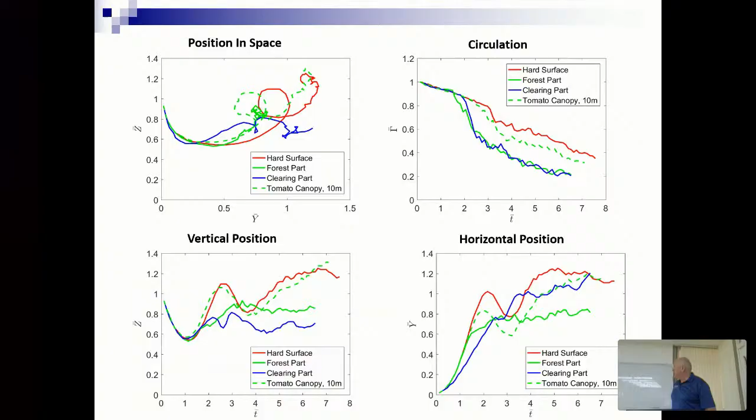We also involved the wake impact effect. We used what we call the roll control ratio, for the guy downstream - for a small UAV trying to fly behind a general aviation aircraft, behind the wake. It was for the FAA, but it applies to any kind of aircraft. We had this RCR ratio to look at what happens if a UAV is flying or trying to take off behind another aircraft, and what the impact will be.

So we looked at the Osprey - that's a small UAV - Predator, a bigger one, and Global Hawk, huge. In front there would be a Boeing 737, and we'd see what kind of RCR results - this is basically an impact severity criteria.

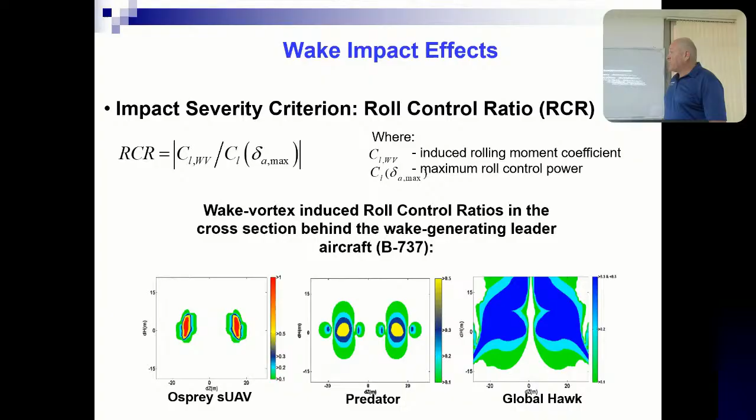If you get to the red line, you're done - you crash right away. For the Osprey, if you hit the wake, that's it, you're not going to survive. For the Predator, you get into the yellow zone, meaning you'll pretty much get hit - if you design your flight control properly you can still do okay, but it's difficult. For the Global Hawk it doesn't matter much since it's huge, so it's not as bad, but they're big in size. For a tiny aircraft you really have to hit the jackpot to get right into it. All this analysis applies to any kind of aircraft, general aviation included, which is why it's important.

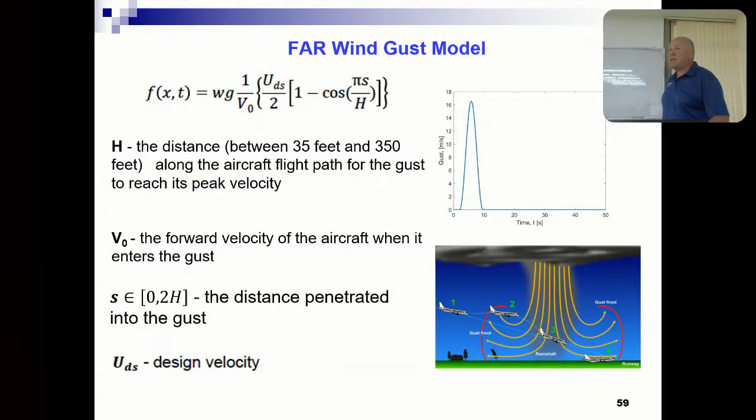So we did this analysis - this small area is the intersection plane of the wake, and this represents your jet or small UAV. We did the analysis using the FAR wind gust model, which was developed to predict the benchmark wake effect, including distance, forward velocity, etc. That's how you analyze it, and it typically looks like a big spike - that's the effect of the wake.

That's right - robust nonlinear control design, which is what this guy from the physics department does. It's all about complex theories - auxiliary regulation error, trying to minimize the error in the control design, etc. Eventually we showed that with this particular design, we could do this control using synthetic jets, or you could use ailerons too, to try to compensate for the impact of the wake on the aircraft. That was the idea.

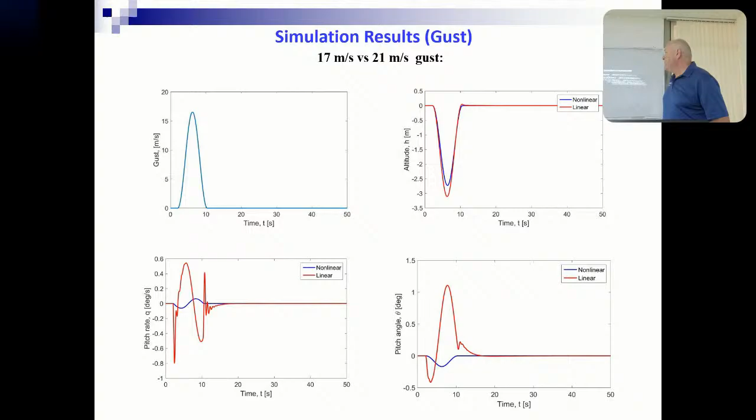All right, so that was the real aerospace part. And can you imagine, that's the bonus - that's the present for you guys.

How about this - that was also my research for many years. I am a researcher in computational cosmetology.

It was very interesting for girls. I would go to conferences where it's the exact opposite - at an engineering conference you have 1,000 guys and maybe 10 girls, but at a cosmetology conference presenting this, it's exactly the opposite - 10 guys, 1,000 ladies, cosmetology doctors.

Anyway, I was involved for many years with a company called Premier Farm, part of what we call APG Labs. It's a New York-based company, and girls need to listen to this very carefully.

This is basically micro injections which can sustain your beauty for many years. It's micro injections in the face or other areas, and you can actually produce peptides which reawaken your stem cells. Your stem cells go to sleep around age 30, and that's why you get wrinkles and everything else, because they basically sleep - so you need to wake them up. These peptides were developed by this company specifically to wake up the stem cells, so all of a sudden you become young again. It applies to everyone.

So anyway, it's a new approach in skin longevity research. We do these challenges, but how we solved this project - I can tell you it was a grant between Embry-Riddle and the company, and we were trying to advertise this as a kind of NASA research at the same time.

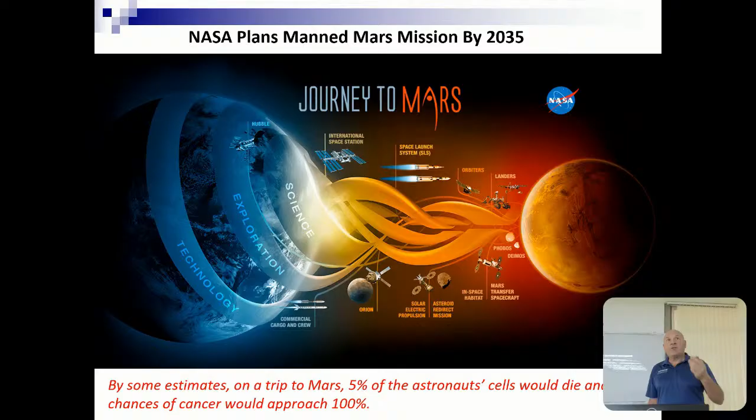So we thought about this. You need to sustain the stem cells properly so they can actually keep the skin young and prevent any cancer.

So next time you go on a date, you don't know how old this guy is. He could actually be 70, but he looks young, like he's 30. That's what I mean. But who knows what's going on inside? You don't know - on the surface he looks young. So that was the idea.

Anyway, the president of the company should be happy that I'm reporting this, because they're always looking for markets to sell these products. So we were doing the computationally optimized delivery of compounds into the dermis - that's our big thing.

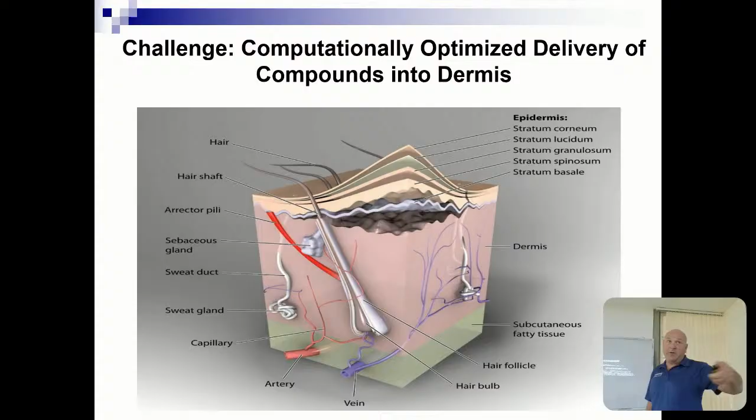So this is the epidermis, you can see here. We had to assign some particular coefficients - diffusion, metabolism coefficient, clearance coefficient, all kinds of things - to count how much of the stuff goes into the bloodstream, how much retains, how much converts. Metabolism basically has an effect on those things too. All these components are there.

And also your actual cells inside could either be attracting water or attracting fat, or fat could be rejected by some pathways, and water could be the same way. So it could be different - you have to account for all these things, like lipid pathways, and so on.

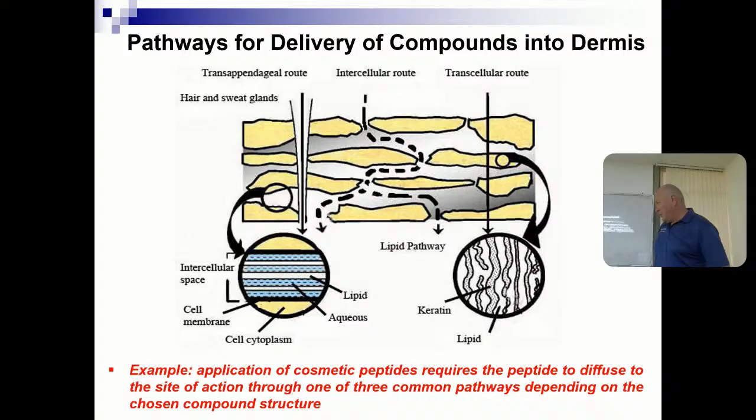So we did this research, this called analysis. We have the diffusion process, partition, binding, metabolism - all these processes that physically happen at the level of the skin cells need to be accounted for, and they account for a lot of the experiments which people are running.

Dermatologists, scientists - the lady doing the research was actually a professor in San Francisco, doing dermatology research and skin cancer research, among other things. A particular analysis was to see if those injected peptides would not produce any cancer. That was a big thing, because they produce effects on the stem cells, but what this chain of events may produce in the end could actually be cancer. So they're trying to avoid this.

There's some bad things. So the point we were trying to do, for instance, for the micro injection, like micro needles here, versus our injection with a single needle, we put everything in the dermis because these peptides are very heavy in molecular weight. So those heavy molecular weight peptides will not be able to penetrate through the dermis layer, right? Or the stratum corneum, which is on top. It's just impossible to get through because they're too heavy. It's very difficult to diffuse for them through.

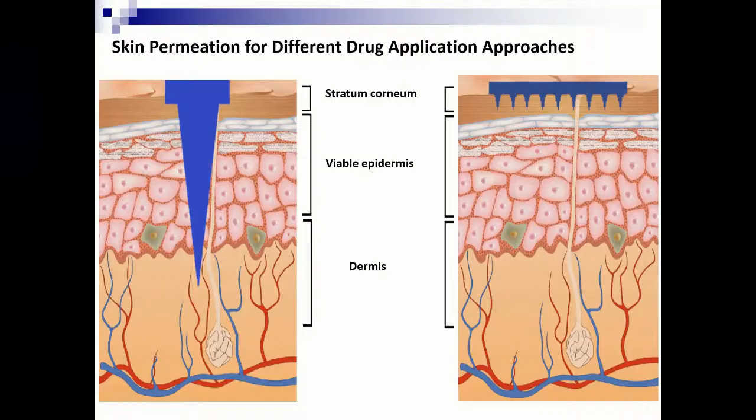So you have to do the injections, penetrate this thing, and then release it right there. Then they go around and basically rejuvenate your dermis and epidermis by this. So that was the idea.

It's what's called a compartmental model, because everything is in compartments in this case. And you solve these equations, which account for the binding, unbinding coefficient, metabolic coefficient, eliminating coefficients, all these things, which account for the blood elimination, the metabolism, and everything.

You solve this, and what we did actually, we used a very interesting method, which is meshless. You don't have to put any kind of mesh inside. There's no grid. It's a meshless method, very new. Well, rather new. It's a transient solution. Basically, it's kind of like spectrum, kind of spectral, but a bit more efficient than spectral. Spectrum may take forever. This is more like a sparse spectrum.

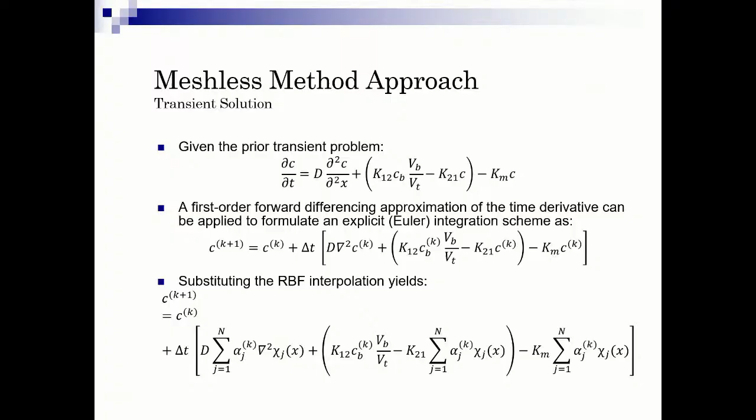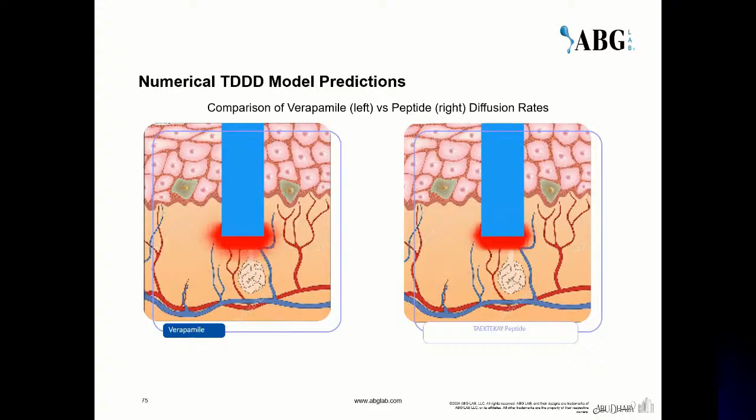So this is actually the time marching process where you estimate at each next moment of time what happens with your concentrations based on a simple Euler scheme now. So we found this kind of analysis produces a distribution of this stuff through all these layers, and eventually we could predict these movies. What happens when verapamil, like a benchmark, a regular drug which people use for I don't remember which kind of disease, but this, for instance, could be something else. This is one of those peptides. When you put it in, you can investigate how far it goes.

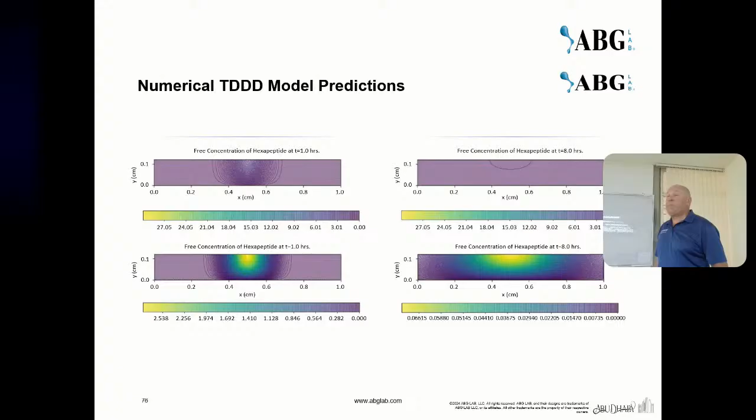And eventually we're doing this TDDD, transdermal drug delivery. Model predictions, and we predicted for different types of compounds what happens, how they develop after 1 hour, after 8 hours after injection. So you can have this kind of predictions, so people know what the effect is.